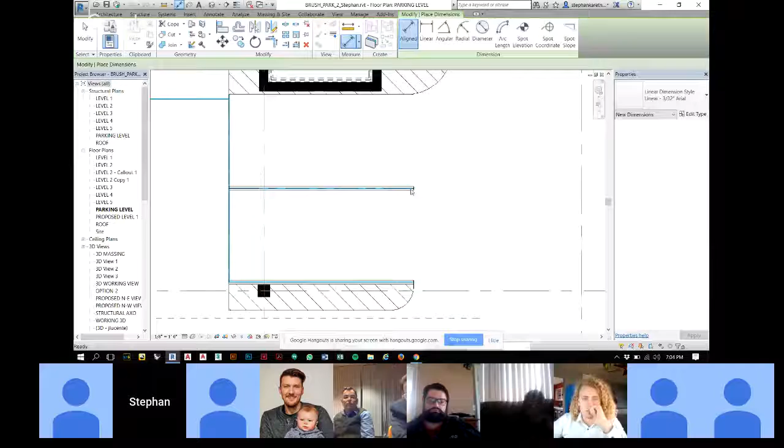The 2 bottom ones need like 20 foot. One second, take the one. The angled wall, it won't let me throw a dimension string, so I can even cut that back. So right now, just give me a 16'9" right now, and I could cut this back.

Could you put one north and south? Yep, put 2 or 3 spots on. Actually, yeah.

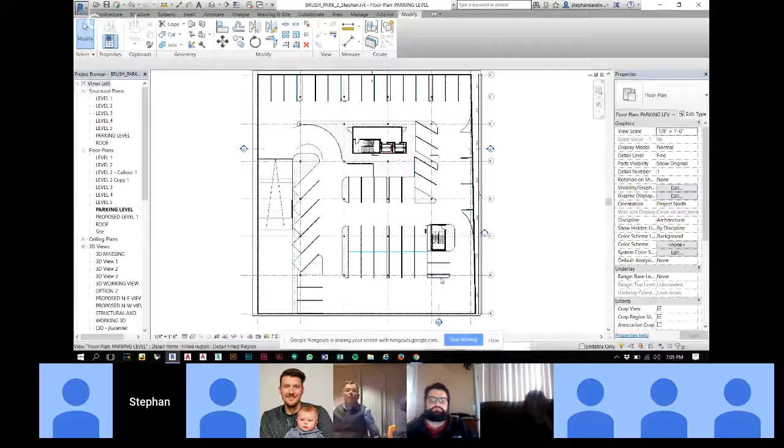Is Mark talking right now? Okay, they're in the...

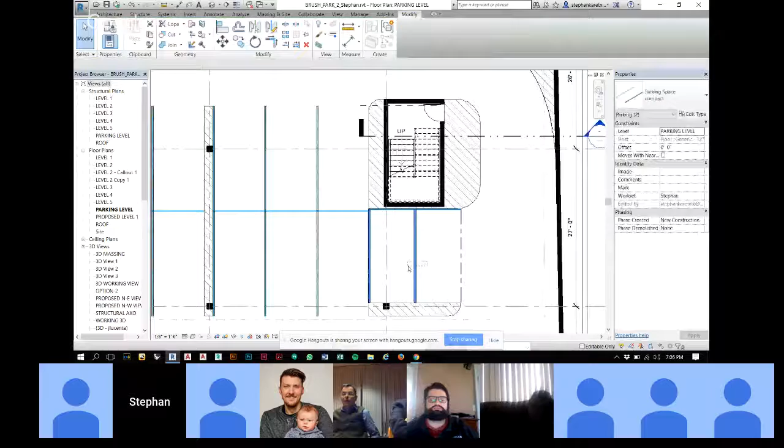What my point is, the 2 that are running east and west, south of the stair, they're a bit awkward, don't function well, but I think you could get one there for sure. If I rotate them, I could probably get it, because they're both 2 compact ones, so there's 8 feet wide, and we can still have 1 lane of traffic.

Right, I think possibly rotate them, just as long as you can make them try to get in there. And then, well, he's got the room, it's just that dimension, where his cursor is, what is that? Oh, I mean the lateral dimension. He wants, yeah, 12'6", that's a little bit too little.

Just a drive-by, yeah, so technically it does work. But I mean, you could also move those 2 spaces past a little bit, closer to the column. I think that's workable. Okay, perfect.

One or 2 orphan spaces on the ground floor. Makes sense. So that cleans up our ground floor to have no parking spots, except for the...

The other thing, so I think there's some, how should I say this without being confusing, there may be concrete, or there may be just the curbing and it's just painted on. Right, so if they're painted, it's a lot more forgiving.

So you didn't number your spaces yet, but the one up near the parallel space up near C, like if I'm parking in the spot up and down, and no one's parking behind me, I don't want to curb there.

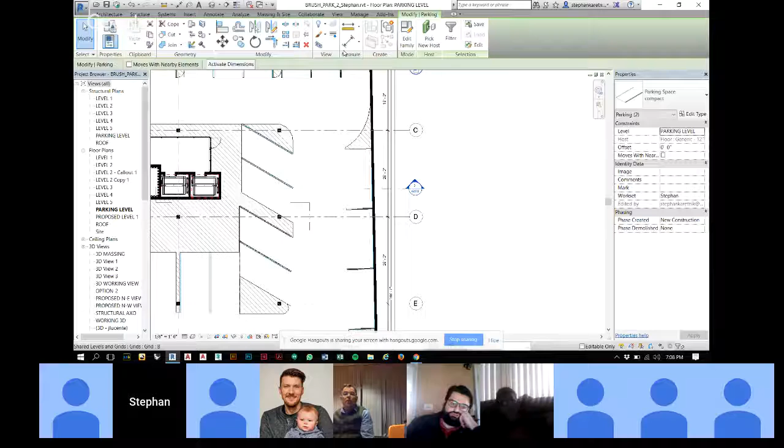Aside from that, everything else we've kind of went over the benchmark, and we're just kind of finishing it off.

What you elect, so we were looking at the energy model. John and I spoke about doing the render text, because one of the comments was we didn't have enough, so we wanted to include that. And then the third option, we were either thinking of continuing on doing the more detailed section, since we're going to be doing the renderings in 3ds Max materials anyways.

Yeah, the COMcheck might take too long if we're already doing the energy model. Those were the three major ones, but...

So Dustin will be happy to connect with you now. If you have questions, shoot them to him, screenshots, whatever, right? He'll be happy to walk you through any issues you guys may have as you're doing that. I think a lot of the stuff beforehand, in terms of our materials and the thermal properties of what we needed. John, do you have anything else?

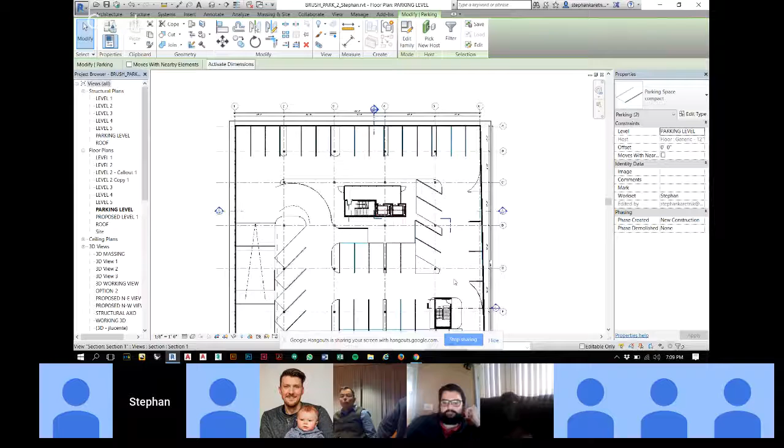Do you want to go over the sketch or no? Do you think I found the sketch, but I don't know, maybe it's better, I don't know. What do you think? Yeah, you share it on your end. Okay, it was just like, I don't know if it's even okay. Yeah, all right, let me see.

So Mark, this was just going forward with one of the comments from our last benchmark, just how to relate to the history of the site. We were just trying to build out something that would relate to the house kitty-corner, - the Ransom Gillis house. Yeah, that was it.

What are we looking at here? So the suites on the corner, we were just going to build out a little shading device around the balconies there, and I think it plays off the aesthetic of the Gillis house, the Victorian corner piece. So just something tying it into the neighborhood.

Is it something that's going to anchor down to the ground, or will it frame it like it's hovering in the sketch? No, there would be like a single column, just like at the Gillis house on the corner. Something similar. Gotcha. Oh, I see it now, I see it in the drawing. I think I see it more clearly.

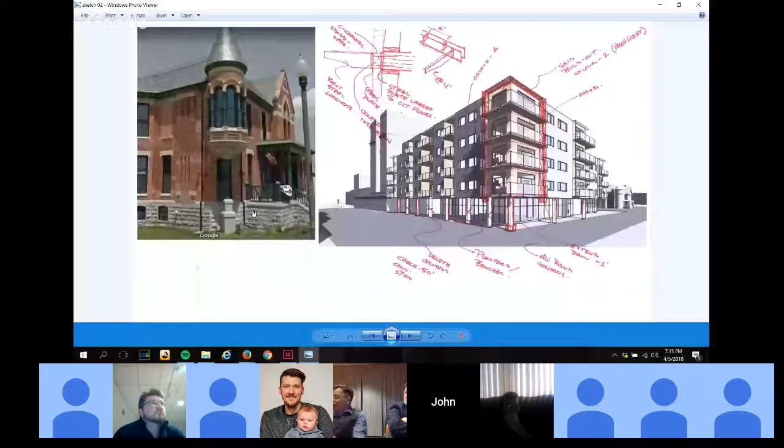What will the railings be? Right now we're currently showing perforated metal panels. Perforated metal. Yeah, so maybe that metal panel treatment is cooperative or sympathetic to what you guys explore on the rear courtyard elevation.

There is a color issue on that corner too, and that is the top turret. Yeah, that's sort of gunmetal gray. It's a slate actually. Slate. Yeah, I'm just off the cuff, maybe wonder if that could be a color complement with one of your materials in the corner. Yeah, I mean, if you can use that gray, that gunmetal gray, that would look good.

Yeah, we'll actually look into the product. I think they would have that option. Yeah, cool, cool. It would offset nicely with the Hardie board in terms of that contrast. Okay, good.

I don't have anything else, but maybe - I'm around this weekend. If you have more sketches that show the resolution of this stuff, I'm happy to look at them. Okay John? Okay, on the lab side, I'd love to see more - I'd like to go into more enlarged elevation studies with wall sections and details.

And I know you guys know how to calculate things like your R-values and your location of dew points, right? You know how to do that. I think now's the time to think about that. I'm excited that you want to do the energy modeling - I know you guys are adept on that, and I think that's great. Also, I would suggest maybe looking into either LCA evaluation with Tally or looking at how you might earn LEED credits. Oh yeah, I want to.

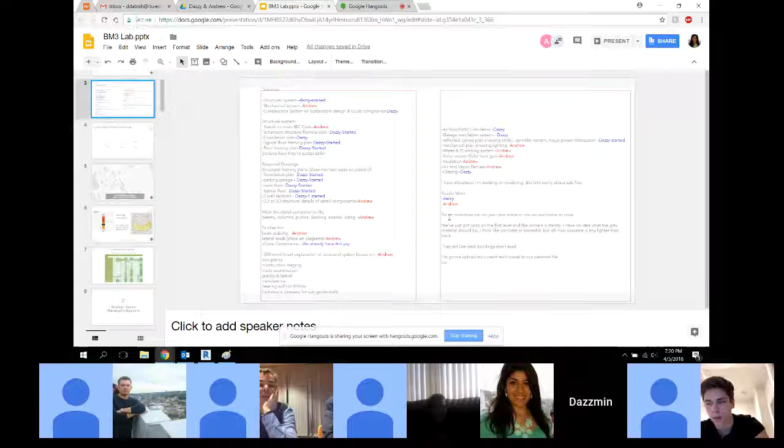So just kind of- yes, we made a list of everything. What, can you do a full screen? Yeah, full screen please. Without the sidebar. There we go. Thank you.

Okay, so that's a list of everything that we're trying to get for hopefully this weekend, early next week for you to look at. So we have most of it started already. Things we're working on are like the mechanical systems, getting all those together for the lab section. And of course for the other section, the solar control, the R values and calculations. So hopefully we'll have those to show you soon.

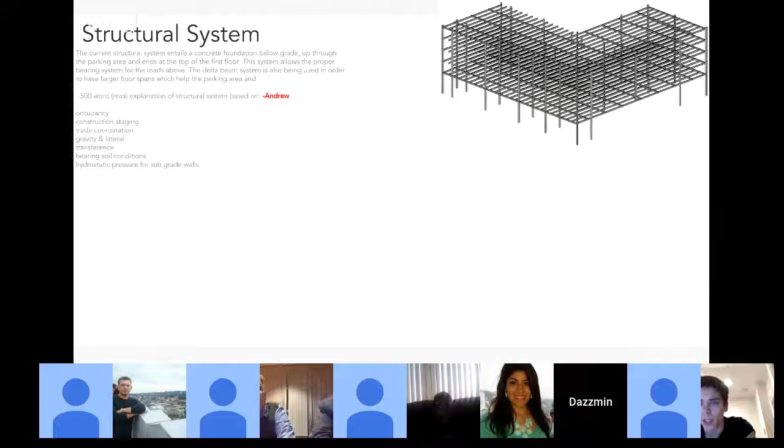Let's see, going now to slide 9, I believe. Actually slide 10, the next one after that. That's looking into the IBC parking code just to make sure that everything meets. And I noticed there were 2 different charts. Does that one look like the correct chart to be using for this parking place? Because I noticed in the PowerPoint for the IBC code.

Andrew, parking- let me try to be really clear about the parking scenario for this building. I hope I've discussed this before, but I'm so old I can't remember what I've said any longer. So you are all required to provide 50 parking places underground within this development. Cannot fit underground, you must find a place for on-grade, but serviced off of the alley. That is to say, no curb cuts from Alfred or John R. Period. That's the first thing, right? Have you heard me say that before?

Yeah, we got that. Okay, second thing is, for the retail spaces that you have or the management office spaces that you might have where someone reports to work in the building, they and any customers using the retail space or the management office space will park on the street.

You don't need to understand what an ordinance says about off-street parking because the parking requirements are set forth in our program, just like I said.

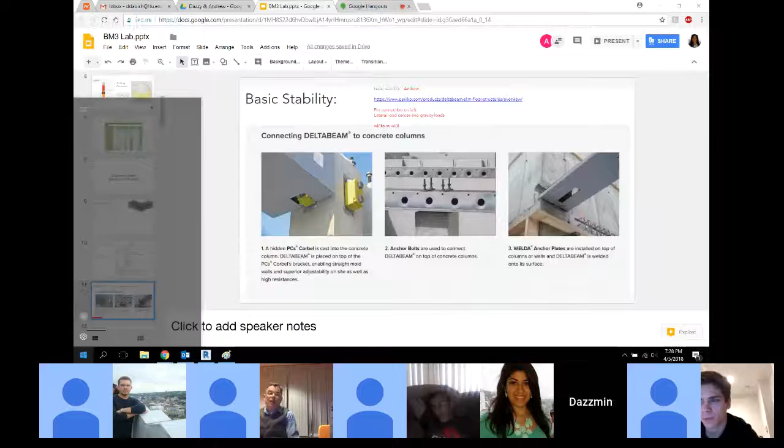One other option for you two is that DELTABEAM is trying to make some traction into the marketplace. They have a technical team you can likely call and have a conversation with, walk them through what you're trying to design and how you want to deploy their system. They'll probably be helpful. You don't have to explain that you're a student, not an architect designing a building, because once you tell them that, they're going to chase you for a project opportunity.

Okay, maybe I'll give them a call tomorrow. That would definitely help, thank you. And possibly continue to look at their specification packet and information packets. Yeah, they did have an installation one and a technical one, but they didn't have too much information in those. Maybe they have more in depth when they come in.

The question would be to understand what are the stiffness conditions at connections for me right now. What's the difference between a pin, a semi-rigid, or rigid connection and what they have? And what does that benefit you as a designer?

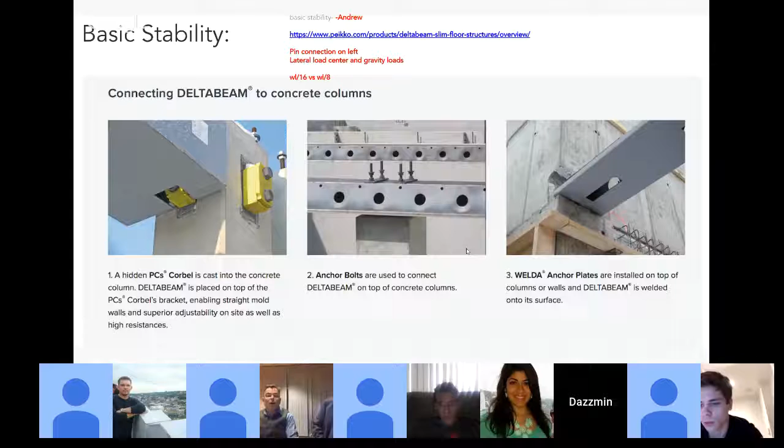The slide deck? Let's see, jumping on to, we're still working on 12, 13, and 14, which is insulation, vapor barriers, and R values. So we'll have those, hopefully this weekend we can send you those.

We had one in the middle. I'm just saying that's what this is built around. Then, if that's a parking deck, can that crane land on that? Will you fall through the deck? No, we had the crane on the lower level, and they built around that. Then they put the deck in last and got the crane on. Yeah, then they removed it. It wasn't a big crane. So we're just talking about a crane on the job site here, and how that actually happened on our project for Brush Park.

The answer is it appears possible that we could introduce a crane because you've got precast concrete slabs, and as you saw in the photo, that's going to be a crane lift. Either the crane sits on the road, which blocks traffic for an indefinite amount, and they're required to rebuild the road, curb, and sidewalk when they damage it. Or you build the crane within the confines of the job site, which is what we did: it was built on its own foundation in the basement and erected up vertically. They built things around it, and when ready to install the last piece, they dismantled the crane and finished the parking slab.

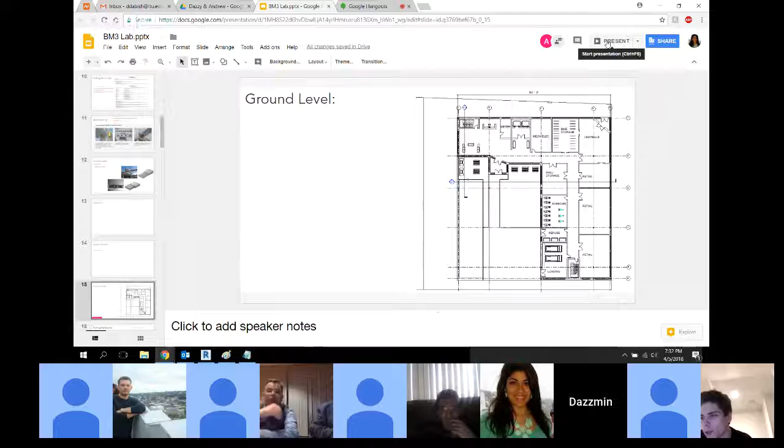So we upgraded the ground level a little. Now there's no parking on it because it's all underneath. And we added the room titles and the exercise room down here, so we're going to switch that from the residential levels.

Okay, let me walk you through a couple of doors here. I'm not sure where the front doors are. Right here, and then there's the back one. So there's an airlock, or a vestibule, for the so-called front door. The interior wall of doors is swinging correctly, Dazzmin, but the exterior, most doors, that has to swing in the same direction, so opposite of what you've illustrated.

Do you follow? Yes, okay. Now, in the same vein, you need to show—you've got a really big room called vestibule. I'm not sure what that is, but...

What is the first room when you come in? Like a lobby space, reception space? Yeah, to the right, lobby reception area. But aren't we looking at couches south of the stair at column A? Reception desk or something—what's going on?

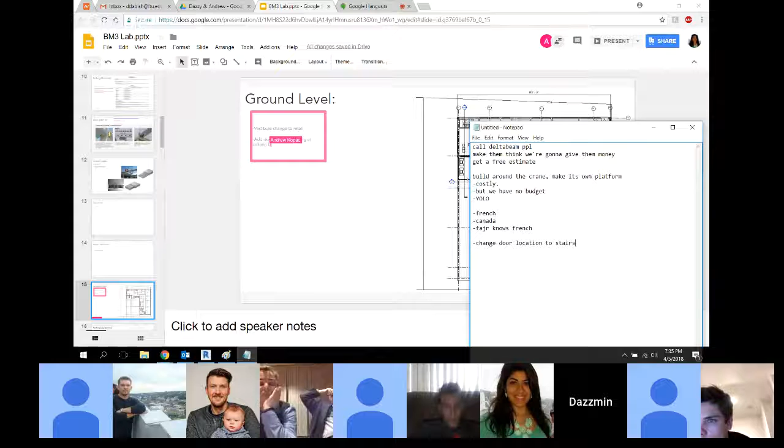So I have a whole bunch of little things. So can we go back to the plan? You need to have an airlock at column B that lets us come in from the street into your development, into this salon, this living room, this lobby, right? And then the other airlock that you do show, which needs the doors corrected, is really to the back garden or the development's sort of more private realm, correct?

Capiche? Capiche? Yeah, the courtyard. Capiche? Hello? Yes? Yes, the courtyard. Yes, okay. Now, retail, as I've said before, I don't know why we keep having to revisit this.

Retail needs to go on the hard corner. Do you know what I mean by hard corner? It's Main Street and Main Street. Yeah, yeah. Like if you're a nail salon or a hair salon, right? Or if you're a Hallmark store, you want to be at Main and Main. And so the retail needs to be there.

And I just want to mention, it doesn't concern me so much that you don't have retail indicated there. What concerns me about this drawing, you guys, is that you're showing the word vestibule, and I have no idea what that is for. That is a huge space that I can't even imagine how it functions. So that to me is problematic.

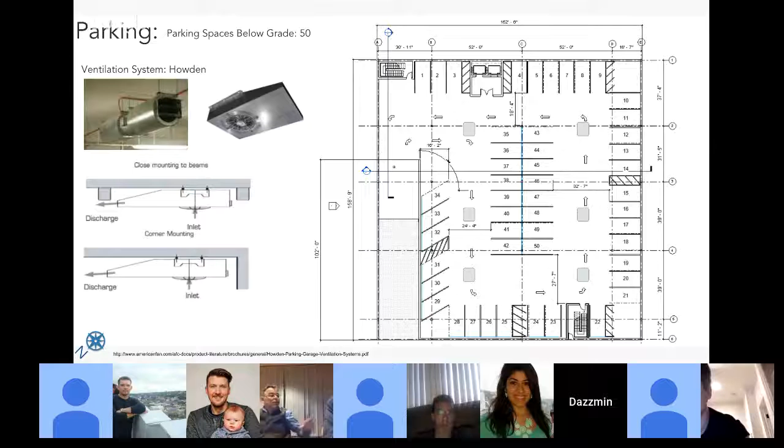Let's go to a residential floor. Did you have something else you wanted to? Can you go back to grade for a minute? Yeah, the ground floor. Thank you. So, bike storage here, does that need to be?

The bike storage - my immediate reaction now, and every time I've looked at this plan, I've always been concerned about how big this footprint is. It's clear to me that you're not in control of the program on the first floor, because you've got bike storage on the street, you've got a vestibule that's on both streets at Main and Main, and no one knows what's happening in the vestibule - not me, not in your house or your shop. You've got 3 small retail spaces, and a mechanical room on the street. That's like a pimple on a prom date, no one wants to see that. You know what I'm saying?

Like suddenly, I could see where maybe bike storage is kind of like a groovy thing on the street - I guess I might have to be convinced of that by looking at your elevations. But I don't want to see a mechanical room on the street. The street is like a coat and tie opportunity, right, for engaging passersby. Think about this as an urban solution, right? Even the exercise room - you know what I'm saying?

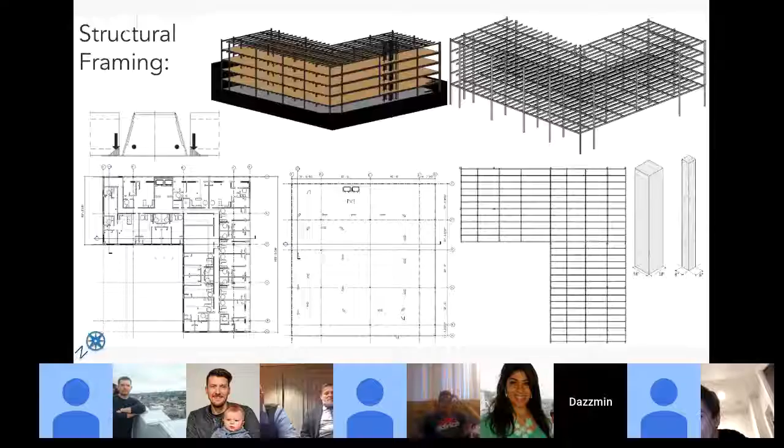Let's go upstairs. I want to see where that trash is upstairs. So where is the trash chute upstairs? I haven't put in a chute. I'm sorry, I didn't quite catch you. Didn't put one in. Well, you need one, right? How's the trash getting out? I know how the trash gets out of my apartment.

I'm gonna probably get a little cart, because I ain't gonna carry it. So I'm gonna take it out of my apartment and take it down the hall, right? I need a trash room, correct? What were you anticipating? I think we can make room inside, right by the elevator. I think we had an open room that had space. Let's see. Can you circle it?

Yeah, so, but Andrew, what did I just say about Campbell's soup and the grocery bag? That's true. Right, like I want these lights to go off. I want you to connect these things, right? So right now, assuming the trash room has to stay where you got it, because it is April 5th.

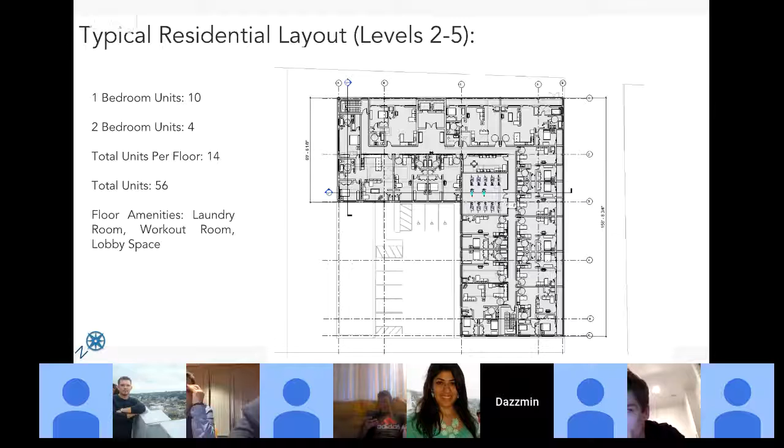Can you zoom in on this plan now? Have we fixed the number of exercise rooms? Because you have one on the ground floor now, and you had 4 before. So has that been fixed? Hello? I think that's on another slide. Let me see. I think slide 19 is the updated one with exercise rooms. Yeah, I'm having trouble comprehending what you're saying.

Is that plan typical of all floors? Andrew, Dazzmin? Yeah. So that means we've got 5 exercise rooms? No, we just need to update it on the slide. Pardon me? No, we just need to update it.

Okay, look, I mean, really, guys, I'm really concerned. You guys have got to button up the design of this building now, because you have so much more to do as it relates to options and as it relates to the last assignment. So you guys are both on notice. I'm going to do anything I need to make you get this wrapped up by Friday. I want to see a deliverable from you that puts all of the stuff in a correct state, because I can't let you advance unless I see these things fixed.

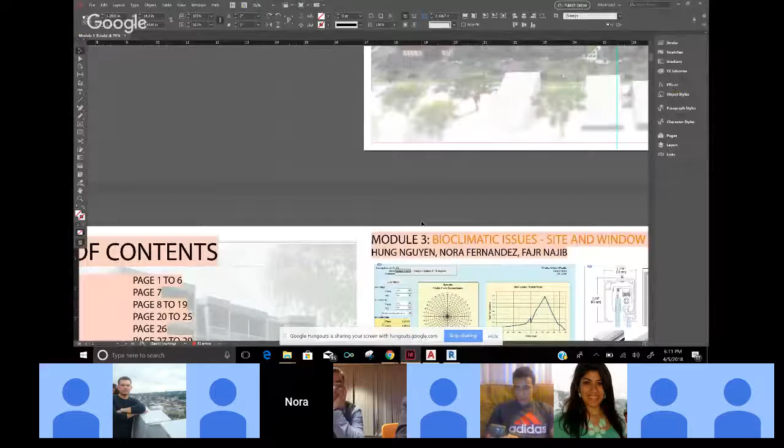So for the bioclimatic, I was able to log in and get a software for that daylighting from the university. I can't remember what university it was. And they gave me these graphs. I can input numbers, but I'm not sure where I'm supposed to get these numbers from. So I kind of wanted to see if you can guide me on that portion. Is it more just the climate zone that we have in Michigan that we would put those? I'm not sure I understand much of it, so I was going to see if I could get some feedback on that.

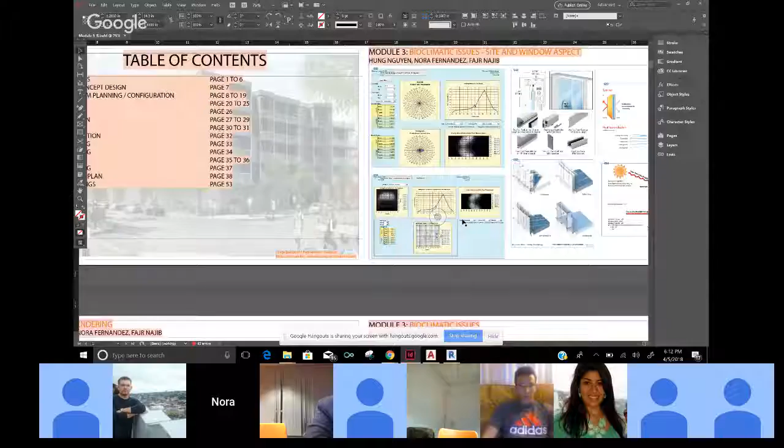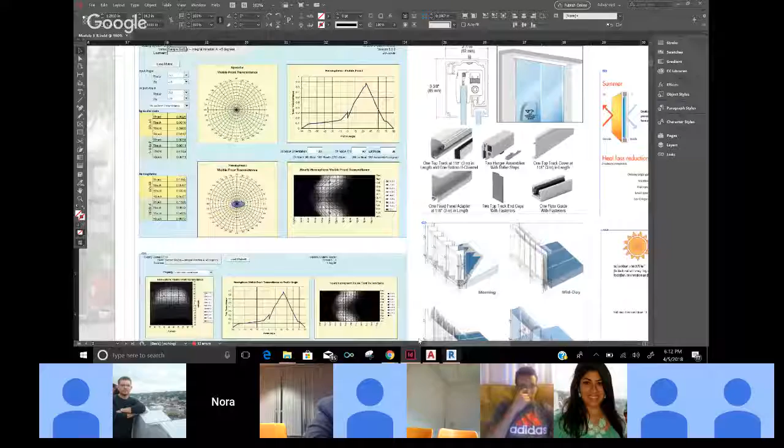You may need to zoom in a little bit. Yeah, I'm sorry. Let's move the screen to the right, zoom even more. And zoom in more, sorry.

Okay, what numbers are they asking for? It's asking for the input angle and the output, and it's asking us to load a matrix. So do I need to create whatever I get from Revit and upload into that? Or is it like a document, like Excel, or is it more of a file itself, and then it does the numbering for us?

Why don't we handle that? Sorry, you cut off. I said why don't we just handle that with another email exchange so I can look at it further? Okay, I'll go ahead and do that.

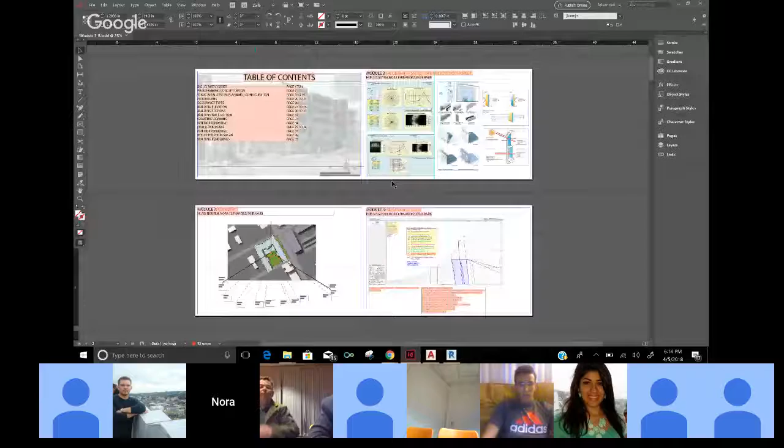Let me zoom out then. Well, I did it too much. I did the chart and updated that on the chart. I did the hours, I provided the hours. So I can do that in an email exchange as well, just to make sure I'm on the right track. I just want to let you know. It's still a little confusing to me, but a little better. We'll exchange email. I also did a calculation of the glazing, and I did a modification to the surface to volume, and all of those that were.

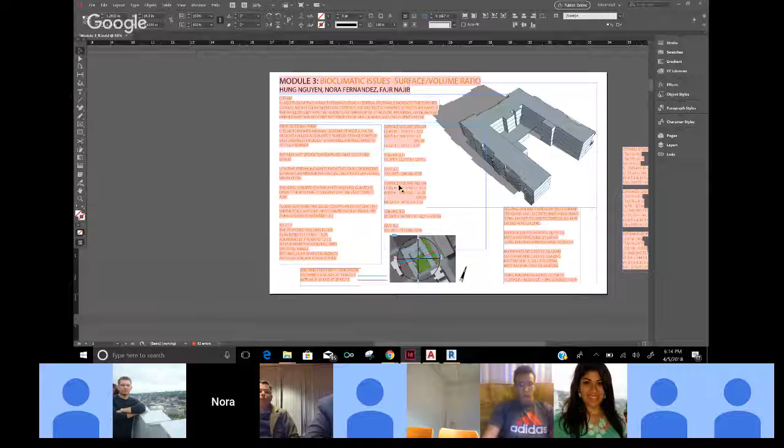Can we see it? Can you zoom in and get rid of all the highlighting? Everything's highlighted, I can't read it. Why is all the text got a pink box around it? You know what, it's a setting that came already. I don't know how to take it off. What's that?

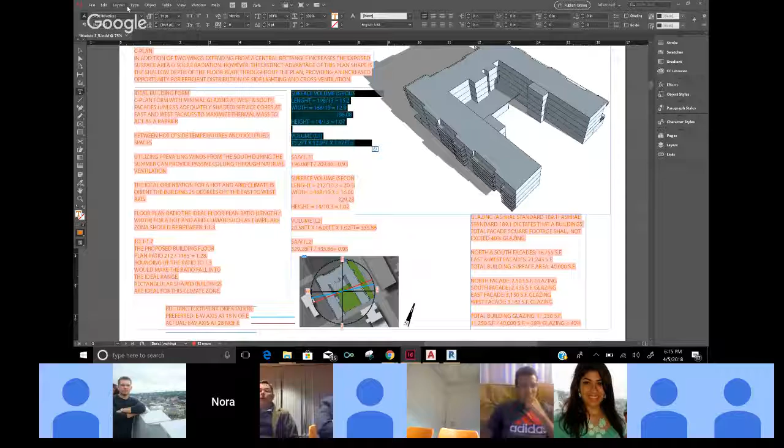Say that again. I see, but if they try to present it in the final presentation - if you have it on your font, it'll get rid of the highlights. It'll show the font like it's supposed to. Click the overprint preview button. Overprint preview, where would that be? Is it in the view tab?

Orange will never print on here. Yeah, the orange might not print as dark as you guys think it will. So make sure you do a test print, because this is the live file. I want you to create a PDF of these sheets so that it's as legible as it needs to be, because you guys are from out of town and have to present online.

Right, okay, I'll make it black. It's easier to understand in black. I'll change the font. You guys do need to do quite a bit of spell checking. Yeah, they've been put on notice about that as well. Okay, got a lot - there's a lot of typos, spell check.

Okay, so my question about this would be, I see your calculation. It looks reasonable for surface area to volume, but what is the recommended ideal for a U-shaped building in a temperate climate, or the one that was in our textbook? Do you understand what I'm saying? You have to compare it to the ideal to know how far off you are, right?

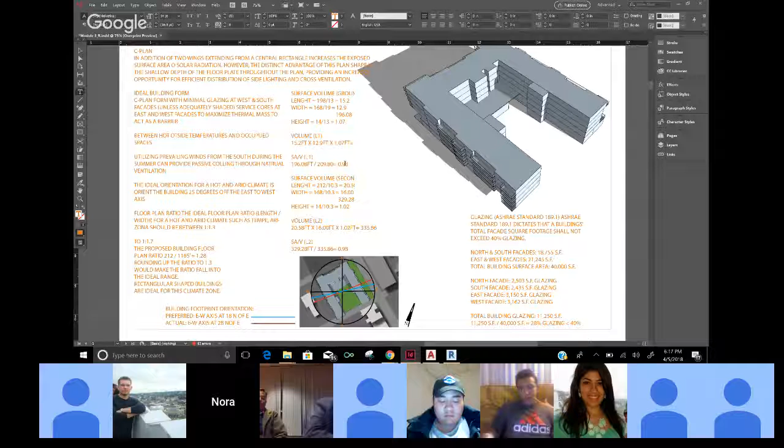Percent glazing, you're at less than 40%, right? 40%, good. So you're under the ASHRAE recommended, below ASHRAE - that's a good property. Okay, so I'll review this again and make sure it's compliant with that ratio that is provided.

Well, it says floor plan ratio, the ideal ratio of width to length should be - sorry, I can't see - like 1 to 1.3 or something. It goes by... no, go to the left column. Oh, this one, floor plan ratio, it's the ideal floor plan ratio.

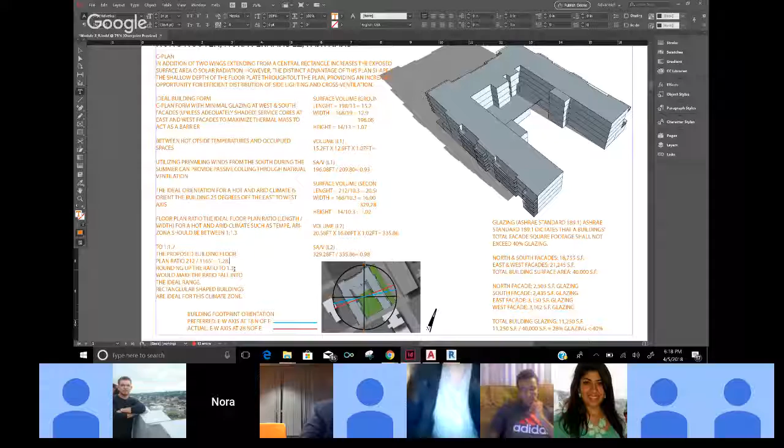Above it says 1 to 1.3. Is that right? Oh yes. Okay, so then what is your floor plan ratio? If that's the ideal, what's yours? It's 1.28. So you want to indicate you're very close to that, right? Right. You understand what I'm saying? You've got data, but you have to tell us what it means, right? So I'm below the 40% glazing. Good, I'm doing well.

I'm half of what ASHRAE recommends as the maximum desirable, and very close to the footprint ratio. That's a good property. You want to demonstrate your successes and the differences, or at least be objective about it. You need to analyze and say I'm close, I'm better than, or maybe this is how far off I am as a percentage from the ideal.

At the end of the day, here's what I need you to carry forward: that you understand what bioclimatic analysis procedures and methods are in architecture, and you know how to start that and be credible in the work you might do in the future, in the event you're working with architects who see that as a measurable, important attribute. And if you're working with firms that want to do LEED type projects, these are some of the issues you'll have to grasp.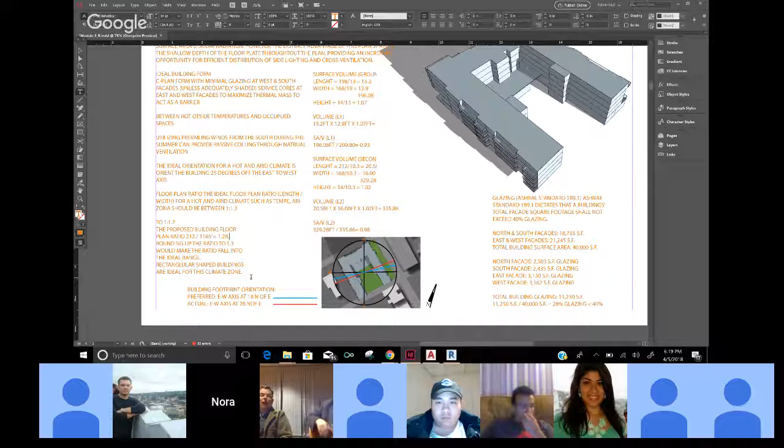Okay, just one thing. I was talking to your classmates: if you click on edit, then go to spelling, and turn on dynamic, that will highlight all of your misspelled words. Wait, like occupied is spelled wrong, outside is spelled wrong. Occupied. It may be because they're all caps. But you can probably take that into Microsoft Word and run a spell check that way, and it may recognize it better. You just copy all the text over.

Nathan, that was my suggestion. I said that to Caitlin, and she just rolled her eyes. She said that is so old school. So you and I must be... what do these millennials know?

But really, I think that's a good idea. That's sort of like the discussion we had the other night with Trevor and Alec about doing things digital versus analog. You guys have been told before that you have spelling issues, I said that early on. So what you need to do is find a way to highlight all of your text so you can see where it's spelled wrong. I spell things wrong too, so I have to be vigilant about that.

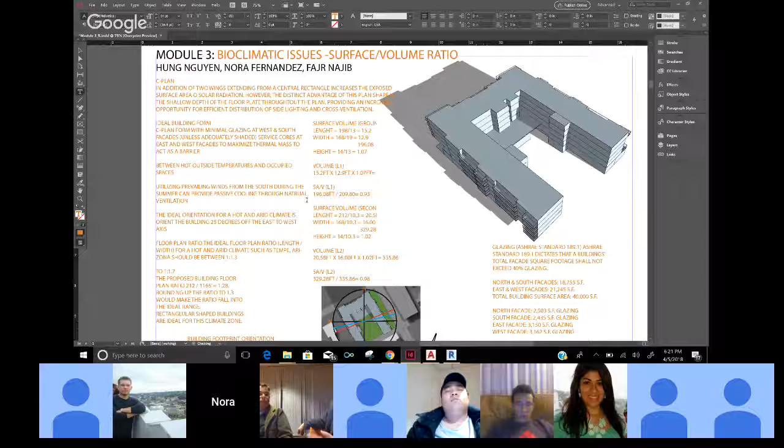So copy and paste all of this text into a Word document that will emphasize those spelling errors, fix them, and then replace the text. A lot of people like you folks are very visually acute, you understand spatial concepts and objects, but some of us are not as adept at things like spelling, and I'm one of them too. But I can tell you this: if you expect to be in a firm and be put in front of a client to show something, you have to fix this. Otherwise, you'll never get that opportunity.

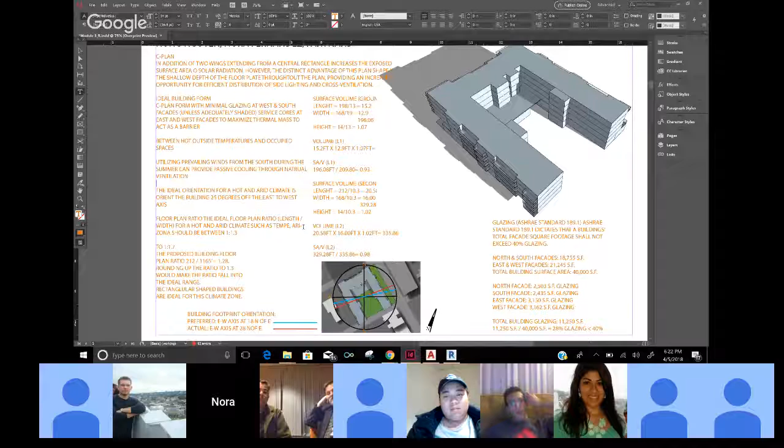Martin Schwartz will drop you a whole grade for this, by the way. Be glad he's not talking to you today. You know Martin, yeah, he'll drop you, won't he? So you need to fix those things. If you need me to look at anything, I'll take a red pen and highlight them. No, it's not sad, it's the first thing I noticed, Casey. You just geek out on words, that's all.

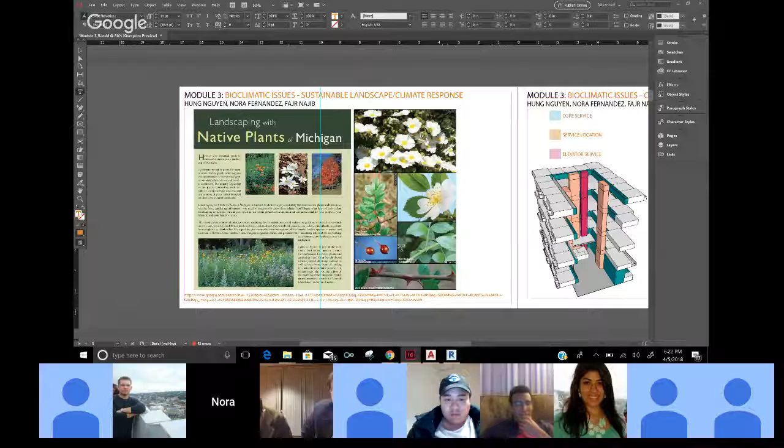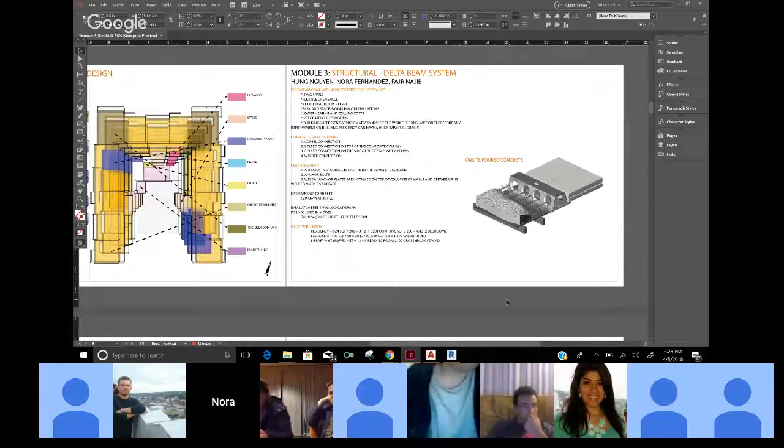Are you running the slide deck? No, Nora is. Is she talking? I don't hear her talking. She can mute it. Well, one of you guys needs to talk. Nora, you unmuted. Nora, are you going to talk?

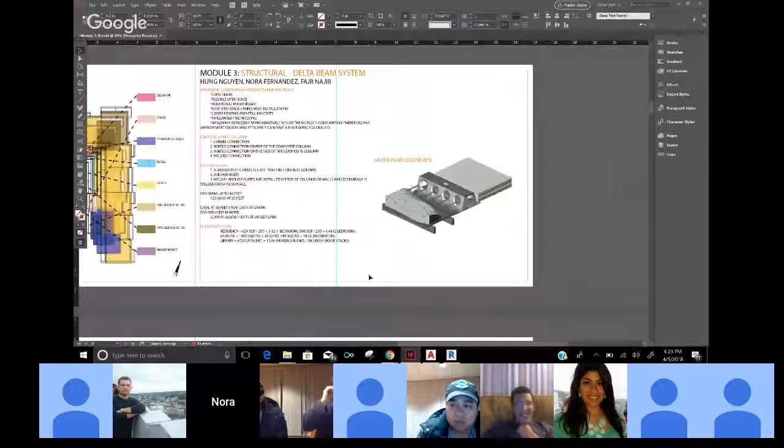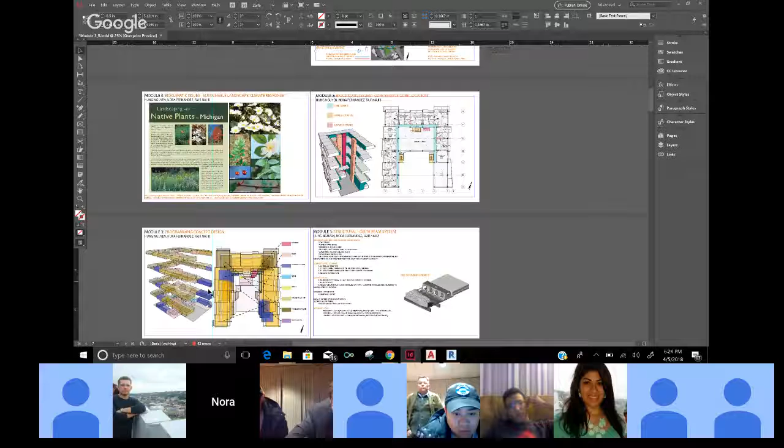The next portion is structural, so let me go ahead and go to it, and I will let the person involved with structure take over. We missed the other slides, if you were talking we didn't hear you. For the core and service section, we condensed it. We had a lot of diagrams, so we pretty much just put the 3D view with the floor plan there. We haven't done much update, I don't know if it requires an update, we just kind of added that information together. Same thing for the programming section.

There's a lot of information in the telescopic view of the plan, but it's not easy to read. We only have two or three, condensed. But these two are right next to each other, making them both very difficult to read. If you're going to do them, you might only want to do one per page. Oh right, because we had them one per page, and thought we had too many diagrams, so we ended up putting them in.

I would say the middle telescopic view with all the spaces on it is not legible. I will be honest with you, I don't think a layperson would understand that. It's such an unusual view of a building that no one will understand that it's the building stacking. It's easier to understand the stacking in the floor plan in the left drawing, but the left drawing eclipses some of those programs. You have to find a way to make it work with one. For now, I'm gonna go ahead and move it out.

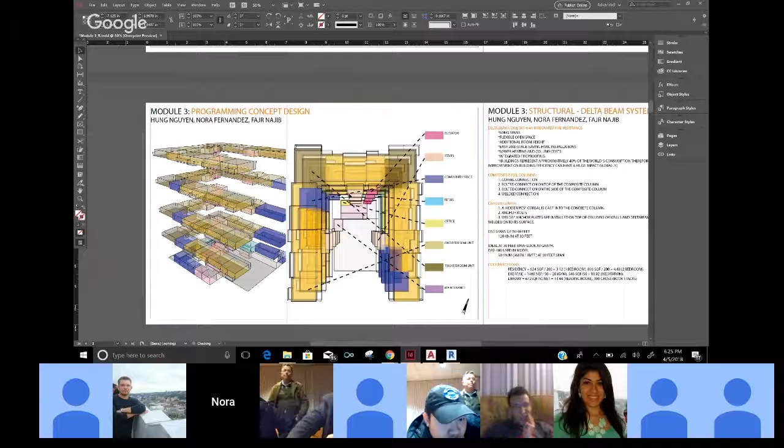What? Let's just rip it off the sheet. Okay, well, whatever, I think it works.

Wait, Nora, just to make sure, is this the lab file or the studio file? No, this is lab. Okay, well, I would say we should definitely change this information because we already selected these.

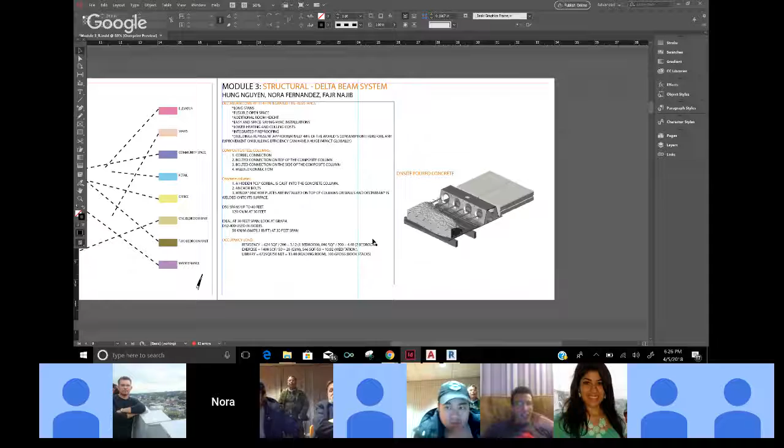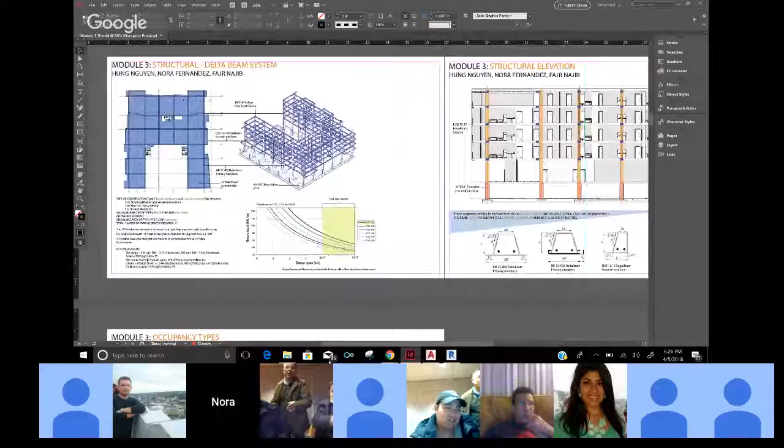Let me share my screen. Or can you go to the next slide? Let me see what that looks like. I'll just share my own. Oh wait, we actually coordinated. Okay, yeah, I'll share my screen. Okay, hold on a second, I got to reveal the participants again. Okay, Fajr, we're looking.

Okay, most of those files were updated. For the most part, I have frames depending on the different levels. So when they alternate, this is the ground floor, this is the parking floor.

Can I make a quick suggestion? Sorry, that's the ground floor right there, this is the second floor. Is it possible to put in a grayscale of the actual architectural spaces underneath that structure so we could see them lightly shown, just as a reference, so we know where spaces are falling relative to that structure plan?

Yeah, I can add those. Show the legend on the left. Okay, thank you, the legend could be smaller. But also, anything that you show me with structure has to be dimensioned.

Oh, so I have to add dimensions as well? Yeah, because I'm asking questions about spans and issues like that. I have to know what the spans are, for example, I can't do that without a dimension. Okay, that's fair, I'll add dimensions for sure.

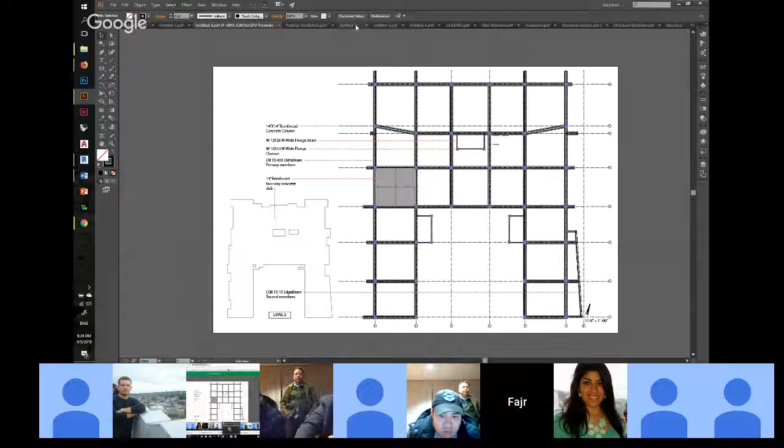Let me see. So that's a typical floor from floor 3 to 5, it just shows the different configurations of the frame depending on how much is needed. I understand. Again, I would suggest an imprint of the floor plan underneath it in a light gray halftone, so we can see how that corresponds to space. Okay, yeah, definitely.

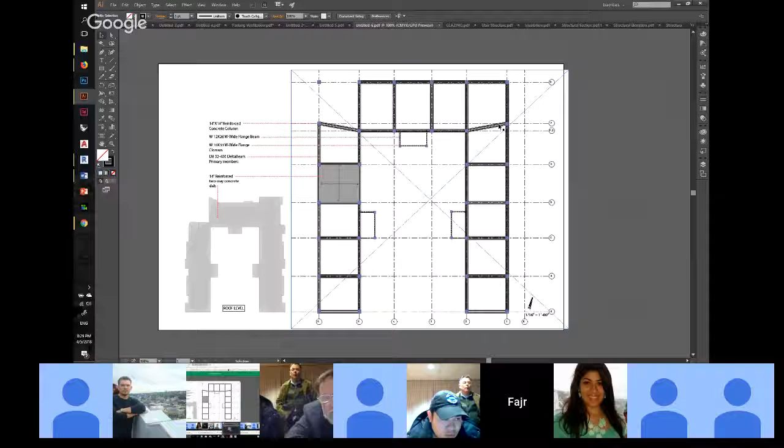And then same thing, that's the roof level. Can I ask a quick question, go back one, back to the plan again. Now I know those beams have that angle condition up around that one there. I thought those went back to being straight when they got to the typical floor plates, is that right or wrong? No, they never go back to straight.

But then I have these for the stairs, so they just show how the structure for the stairs is slightly different. There are different members in there, it's not delta beams, and how the fire protection runs all the way down, and it doesn't kick in here because of the necessary space needed for the higher ceiling space.

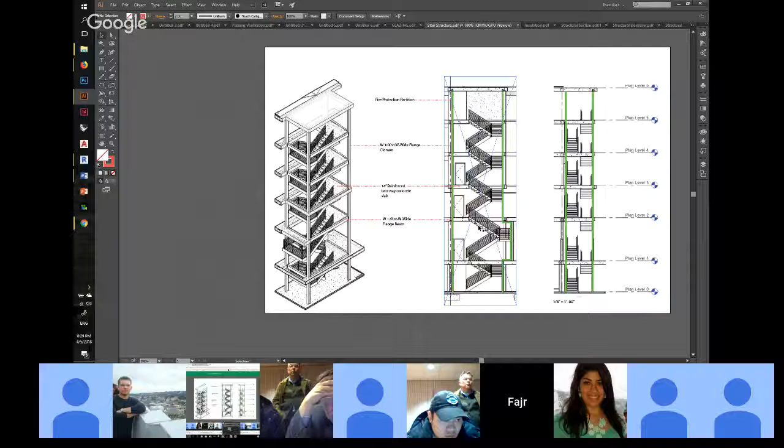Do you have headroom? Because I see that the floor above is kind of imploding on that landing. Right there? Yeah, I'm walking down the stairs and there's a floor hitting me about the size of my chest. You need to cut another section. Yeah, I have to look at that, I definitely have to look at that. You got to cut out the floor if you can, but even if you did, the beam is still hitting me in the chest, you understand my point?

Right. Well will there, oh yeah, the beam will be there, right? I'll have to revise that for sure, see if we can do that please. Yeah, I'll have to revise that.

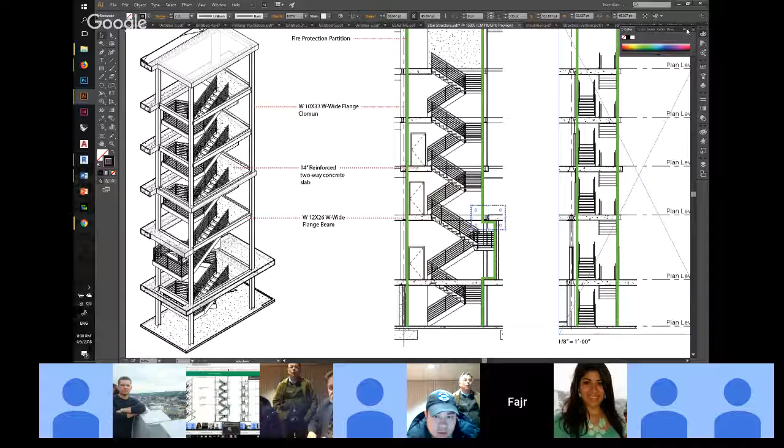Just talking more about the way we're going to have the delta beams come together. At the base, when it comes to the foundation pillar to the actual hollow beam, there's a condition where they have an anchor plate that attaches to the hollow steel column with the concrete, and that fastens to the pillar through bolts. Then when it comes to the beams attaching to the column, the beams are going to be bolted and welded to the column so they can create a rigid connection and withstand the lateral loads.

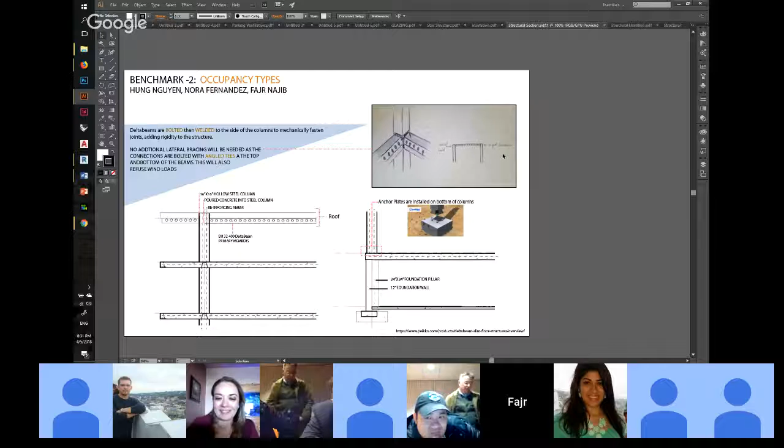Yeah, I was looking for an image of a delta beam being bolted, and I couldn't find one, so I just drew one. What? I'm smiling out loud, that's all. Could you contact the manufacturer? No, but I kept looking through their website. You could. I could. You should contact them. I should. Okay, yes.

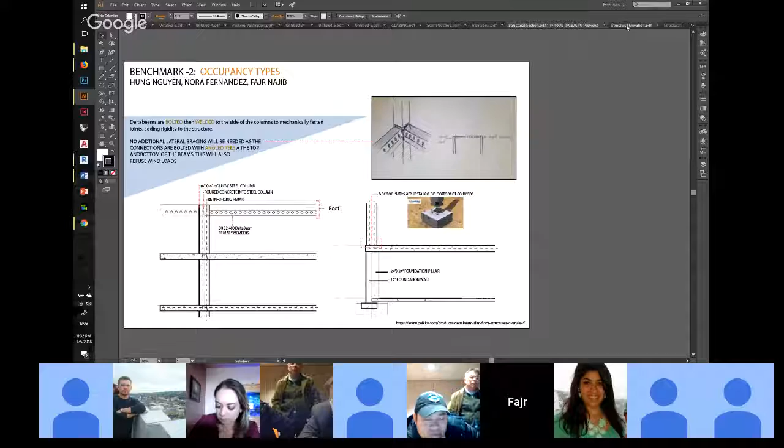And then what is that? This is just a section of the entire building. You're titling this occupancy types, but that's not really what this is about, is it? No, I want to change that, but I just didn't get to change it yet.

Yeah, that's just like a section of the overall building, showing how you have the pillars at the bottom, the regular columns going through past that, and then you have the beams in blue.

It's still, unfortunately, that one—the second column from the left—doesn't register over the beams. The beams don't register over the columns again. That's the bent one. Oh, never mind. I understand. Should I put a note on it to explain? I'm not sure. I don't know exactly how to do it, but it would have—

It might be useful to have a note saying the beam realigns with the column at a distance or something beyond. Yeah, because I remember we talked about it. It came up again, I guess. So probably should take a note.

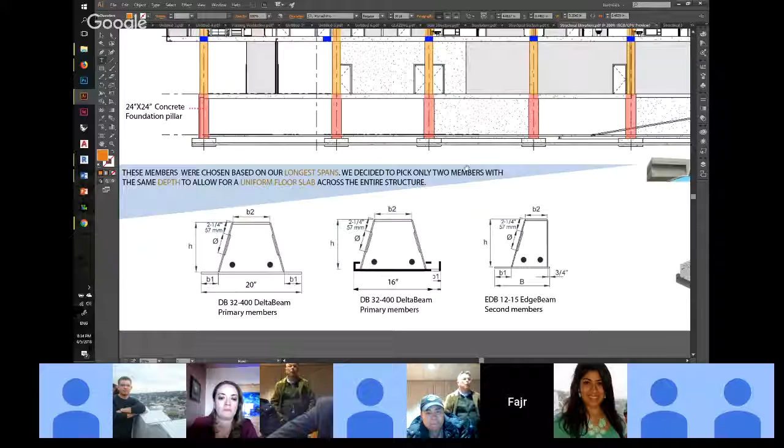I'm not sure what that would mean. Can you go up and to the left of your drawing right now, to the balcony? Right here. Okay, so the balcony is cantilevered, correct? Yeah, the balcony is cantilevered, correct? Yes.

So you're going to have a very rigid connection at that balcony back to that beam to make that work. You understand that? Yes. I looked into how Delta Beams address cantilevered situations, and they take that into consideration with their connections—so all of their connections in general. So I'm taking that it can be rigid. It didn't specify whether it had to be a rigid connection or not, because they still had the same specifications regarding those pin connections with concrete columns.

It has to be a rigid connection going to the left, otherwise the cantilever doesn't work. So you're saying it has to? Okay, well, yeah, I made sure that all of the connections are rigid the way we're attaching them.

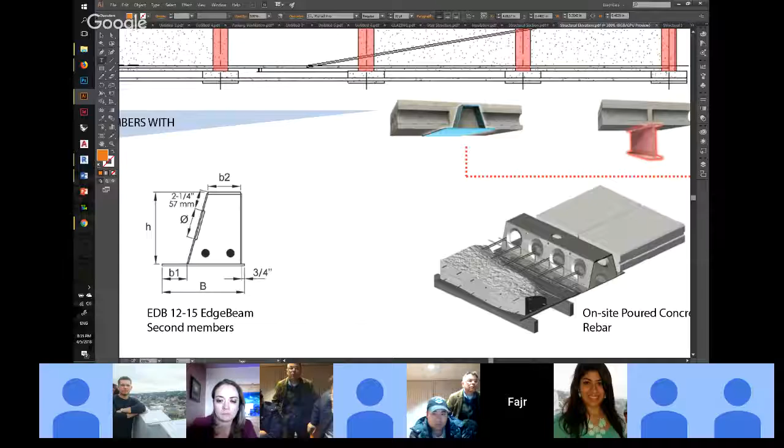Should I zoom out? Yeah, go ahead. Here just shows how the concrete is poured and how the rebar is embedded through the Delta Beam, and then continues on to the next pour that comes beyond it. And here's a small diagram showing how the headspace is being cleared thanks to that system—why it's shallower.

Does embedding the slab in the beam help with rigidity in terms of lateral load? It gives a more direct load transfer to the boundary chords and strut members when you have a lateral load going through the diaphragm. So theoretically, yes, it should help, because the boundary element, the chord and strut, is aligned with the diaphragm rather than being below it. Does that make sense? Yeah, that was one of my assumptions, but I wasn't sure, so I wanted to ask.

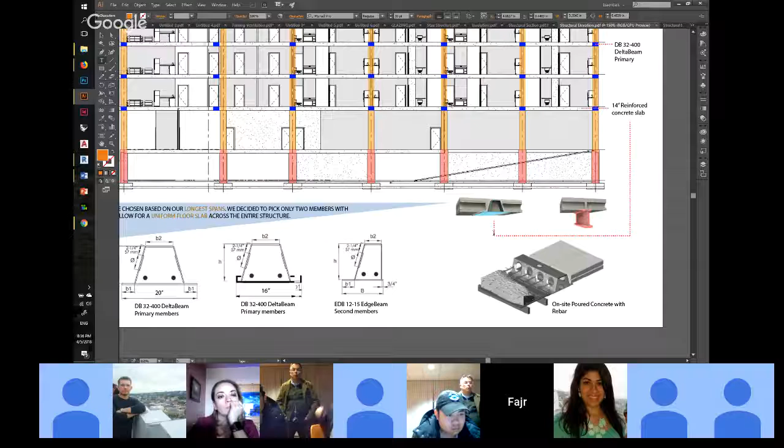Yeah, this is the same one. Should we finish the lab and then ask further questions, or should we just ask them now? If they're short questions, or something I don't have to research, I can answer now. You can take it now.

It's something you addressed about parking ventilation during our Benchmark 2 presentation. We decided to go with jet fans, and I came across jet vents, which had much more detail on how they operate, their thrust, and how they're installed in the parking system. But I realized they're based in Ireland, so I assume we can't use that system. I would think they'd have a U.S. distributor, right? I was looking for one and couldn't find one, and I'd say that would be hard to obtain. So I figured there are also jet fans used in the US, and I could just go with those instead.

Do you have any openings through the courtyard that let air into the lower level parking right now, besides the ramp? The only two openings are that ramp and the exhaust air right here. Okay, well, if you could cut openings in the slab, that would be another way to let air in, probably in this area where there's open space on the ground floor.

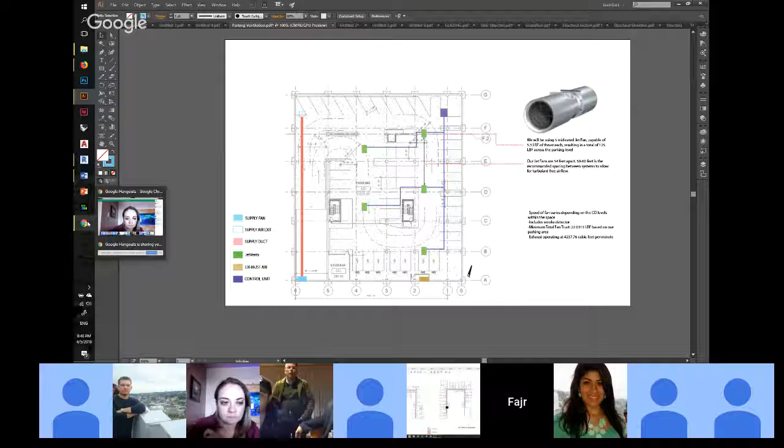I guess we can move on. I probably have another question which might be longer, but we can move on with this lab section and come back. Nora, do you have the presentation, the Hung section? Yeah, I'll share mine. Or do you have it? I got it, I'll share mine. Okay, so we gotta go to Hung.

But those outdoor units for the VRF, can't they also be on grade? Yeah, they can be, but since you're close to the first floor, maybe think about that. We have all the PV panels and also heaters on the roof, so it might as well be there. Electricity is always going to go through the electric panel no matter where the system is, and get rerouted down, so proximity isn't really the issue. So you have solar panels, what type of hot water panels?

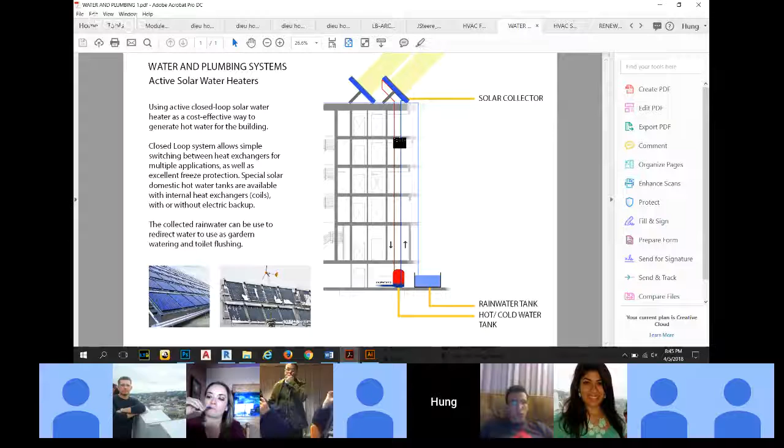Next to the rainwater tank, there will be using both rainwater and recycled water. That's used for the building's toilets. That's for the HVAC water too.

I even see the construction lines on there. This is making me cry.

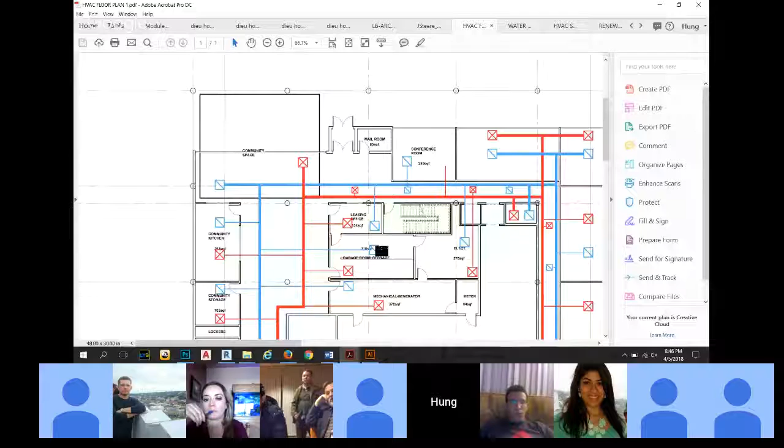That produces that movement. In some cases I think you may need more emitters than you're showing. I suspect some of those larger retail spaces might wind up having to double the emitters - you'll have this out, probably a couple, but this one might be way back, and there might be two returns, or you could do it for the retail like that.

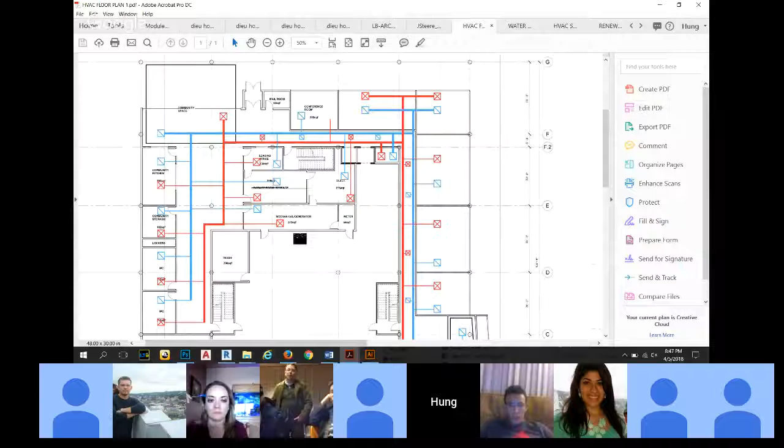You could do one here and then one here, based on the amount of square footage you have. I would think that's not going to work - I was going to do that, but when we were talking about the unit plan with the kitchen and living room, I put 2 for each. No, I'm just talking about retail. I'm saying based on the square footage and the thermal heat loss, I'm not sure that's going to be enough. Quick question - the trash room and the mail room, I didn't put it.

Trash room, what? He doesn't have any service. Is that going to be air conditioned? And it's going to have exhaust - its own exhaust. Because that room's going to stink.

What about the mail room? Or is it completely inboard without any surrounding outside walls? There's got one outside wall right here, and the mail room has an outside wall. What room are we talking about? The mail room - I'm not sure that's needed because it's just going to get air from the lobby. It's probably not - does it even have a door? Yeah, it does. I don't even know. Really, see what I mean? Just make it an extension of the lobby.

Main lobby - already showed you the unit back in the last class, can go back to it. This is just the HVAC for the hallway, for the lobby corridor. Also for the gym area, not the library - that's the prayer room, the meditation room.

Okay, but again, I'm looking at that prayer room on the lower right. I got supply on the outside wall, but then I got return on the outside wall too. Understand what I'm getting at? I think you're gonna have one return back here, but you're gonna have heat all along. Right, you're gonna want it in this room - you're gonna want to put supplies on both sides, and maybe return.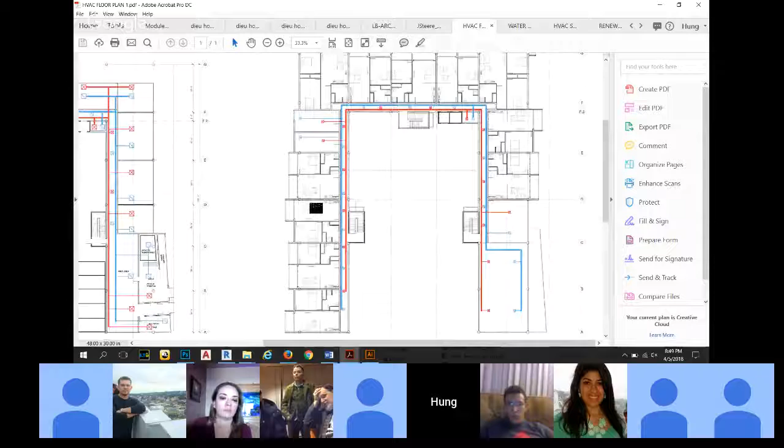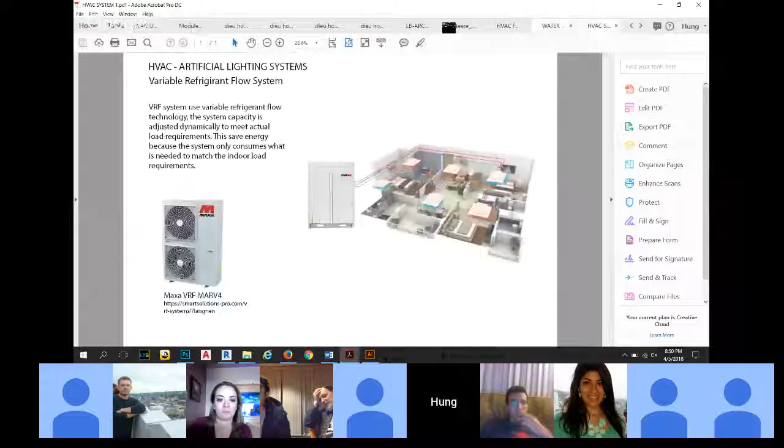Okay, and flip - go back. Flip. These would flip, okay, they go the other way. Red inside, and where the loss is, supply goes - the loss is always along the exterior.

Turn. You say that you want the... I would put supply and supply, and I would want to flip the supply and return on the inside also. What, in the fourth drawer? Yeah, that space is so small, it doesn't need that many returns. I would think Professor Farlow's correct - you could probably get down to returns, probably 3.

Not even - supply, I don't know what you're saying. The reason why you put the supply in is you want positive pressure before the return; you put the return in, you also suck it out. You want more supply, not much return. I'm also asking the same question - do I need a return at all? I'm thinking not. In other words, you just let the air infiltrate directly. Once the door opens for the unit, that balances that space out.

Right, so you would want always positive pressure before the return. If you cut it down to 6 or something, that's 3, that'd be all - I'll change that.

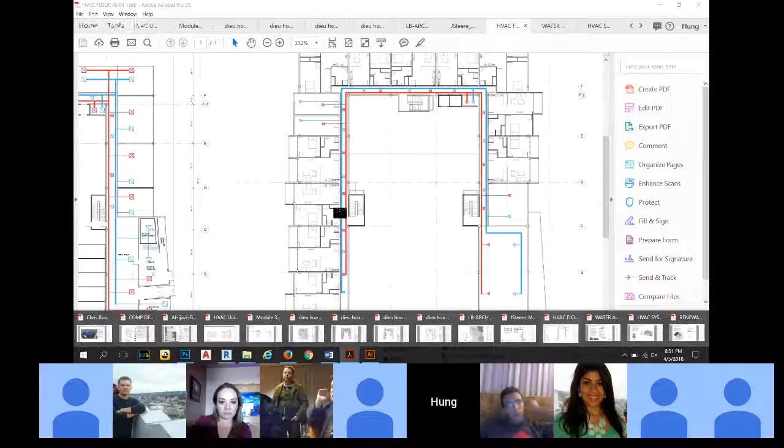So that all basically gets converted to AC. Yeah, goes into the electrical system. And we have that meter - storing the batteries? We do, I think we do, but I think this takes 5 cents.

That means with the price, you don't have to have batteries. I think you just push it through.

If you had more electricity, you could sell it back to Edison, but they don't give you much for it. Now, when would that ever happen? I'm not sure, I don't know. It's basically 20%, you're pretty much draining it down.

Yeah, that's what I'm saying, for buildings like schools. You're only going to hit at best 5 to 10% of the building's electrical load, trust me. Because even though you're energy conserving, you're not going to produce more than you could. I would highly doubt it.

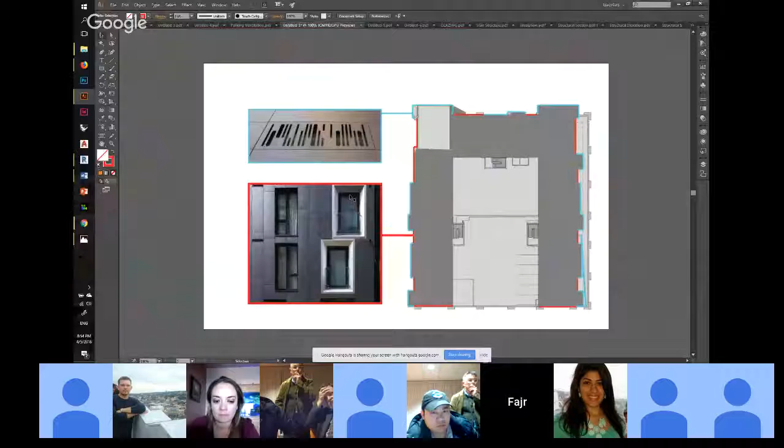So this is how we kind of want to address it. We discussed how our HVAC unit is going to be on the balcony, and we talked about how we could implement the design of the panels as a louver.

Correct, so we were considering having this kind of Equitone panel on the balcony facades, so they could act as the railing and as the panel walls behind the railing, as well as acting as a louver for the HVAC unit. And then the rest of the facade, which is not a balcony, can be this kind of facade.

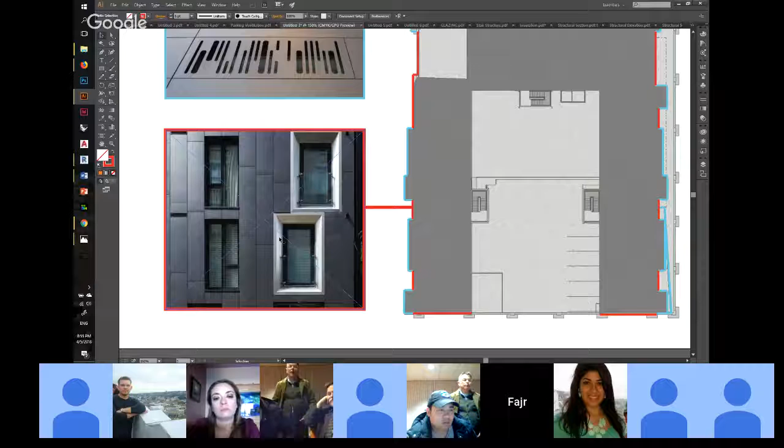Lovely, I love how streamlined that is, how one idea is working a number of different ways, and that promotes efficiency and economy. Yeah, that's what we're going for.

Are all the exterior panels Equitone? Yeah, we're going for one material, just different ways of how they are made. I understand that, but going back to Professor Farlow's comment, that also streamlines and simplifies construction and construction coordination, it reduces the number of trades. You reduce the number of modules. Right, and if you've got errors, you know who to go to.

But you can also promote variety and difference by doing different colors or different textures or finishes, doing them random or in areas. So those are ways, variations on a theme.

Does Equitone qualify for LEED credits? Do you know? Yeah, I know it's LEED certified, I just don't know how many. Okay, that might be worth researching.

Yeah, okay, and also something real quick. Oh, go ahead, I like where you're taking this. There's one detail that I can't show here, but I want to show you, it's part of this section.

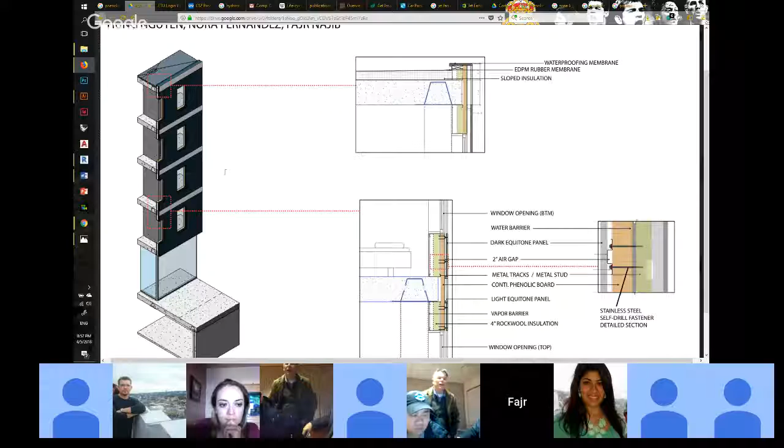Sorry, I think you ought to illustrate it as an elevation. Does it project forward or recess or stay in the same plane? It's on the same plane, so it's like this, it's in the same plane.

Are you thinking of orienting the panels, the Equitone panels, with predominantly vertical joints? Yeah, yep, except for that one moment where the levels change and where the slab is.

I think the jury's still out for me on that. I think you ought to look at this, because I think what happens is that the vertical panels that are, let's say, the dark gray, are all just going to stack and be like soldiers in line because they're going to be interrupted by the belt line.

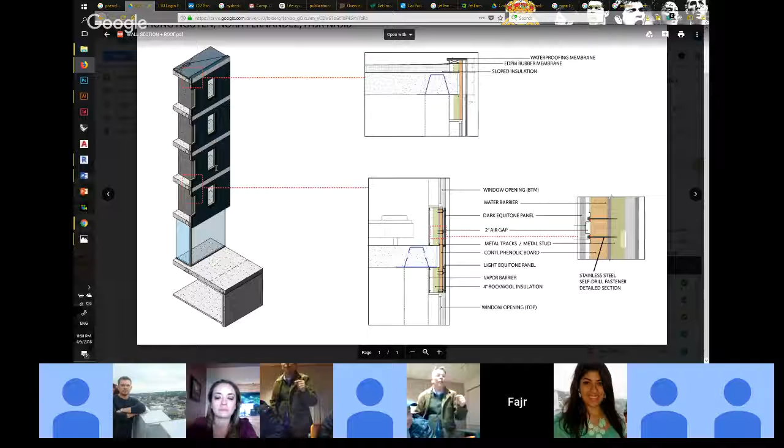But in the picture example you had a moment ago, there was something kind of nice about the running bond or the modified bond pattern, where the horizontal joints didn't always line up. They kind of told their own story. So there's something nice about that.

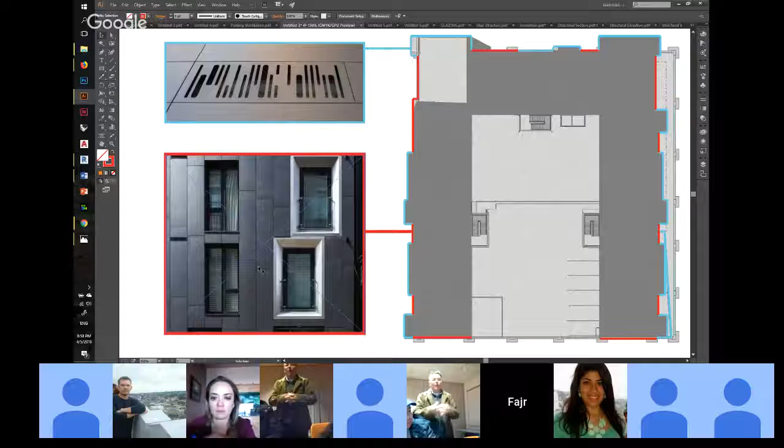Think about how you wrap the stair core as well. Those are going to be unique elements that may need their own attention. Especially since the stair cores are inside—aren't they seen from the courtyard view? They are seen from the courtyard, they're nodules on it, so I think they require design attention with respect to how the panels envelop or contain them.

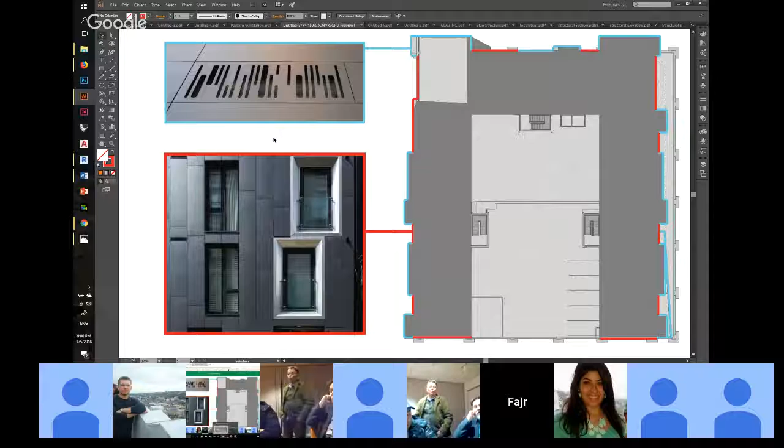My instinct is to start with elevation studies like this example. Can you do about a 10 to 15 foot wide swath, all the way from grade to the roof, to the parapet—a large, nice drawing oriented vertically—and then do a corresponding wall section cut through that, incorporating a balcony idea into both the elevation and the section cut.

I kind of did this, and I'm thinking that's what you're talking about. I'm sharing my screen—it's not showing the separation of the balcony from the other panel. No, I want to take just a slice of the long elevation, not the whole elevation.

Wait Nora, how did you put the Equitone on the screen—on the elevation in Revit? Oh, I didn't use Revit, it was Photoshop. You're very clever, Nora. If we do that in Revit, we'd have to create our own family for each panel, different families, just to change color on all of them.

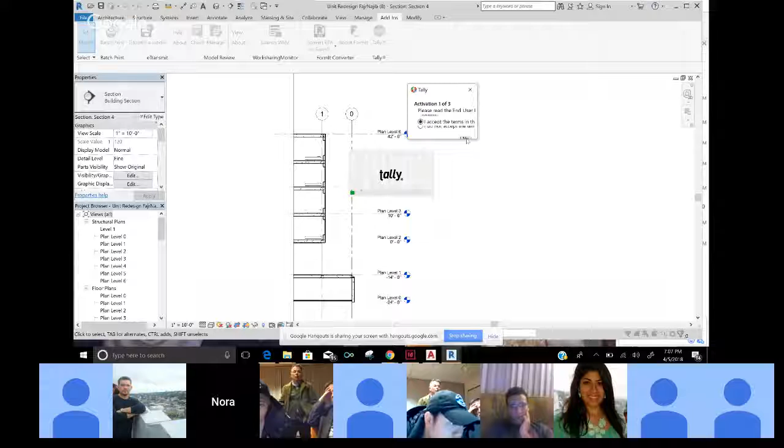Let me share my screen real quick, I don't know if that makes sense. It's literally how - is it a display issue? I have Tally here, but once I click on it, it gets stuck and doesn't do anything. So if you see that screen, for me it's larger and I can click on it and see more options, but hers is too small so she can't click on anything or access the options. I can do this, it prompts me to this, and once I accept I don't know what's going on after - I can't open the window, even if I click it. I'm wondering if it's a screen setting.

Any idea, Fajr? No. So Fajr, is it working for you or no? It's working normally for me, but I have my own computer, I don't use a school computer. Nora doesn't have a school computer either, right? No, I don't. What is your screen - it's weird.

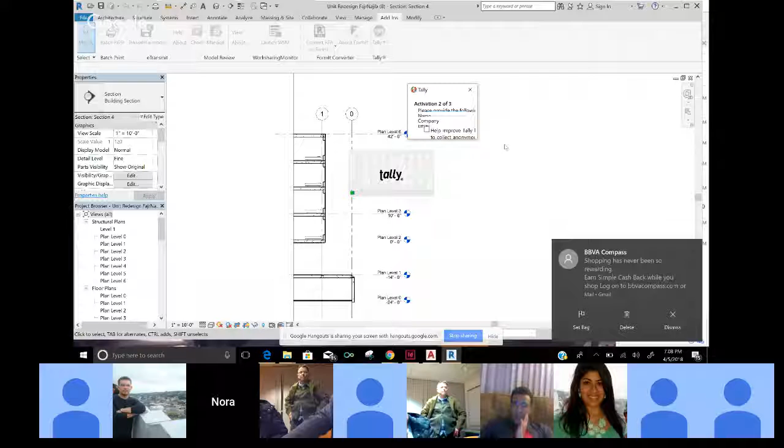What is your screen resolution setting, Fajr? Do you remember? I can look at it right now. I think it's 1920 by 1080. Nora, what's yours? I'm not sure, do I go through Revit or just check another way?

Right click on the desktop, go back to the desktop, then display settings, then go to advanced. Where is it? It's right there - resolution. Maybe drop it down. Wait, what's that, 250%?

Try 100%, 150 works too. Wait, leave it at 100%, then change it to 1080. Yes, I think because his screen is so large, 1080 is not quite right. Just work through it with them and let's see what happens next. Then go back to your Revit and do what you did earlier. Whoa, that's weird - no, that's a big mouse though.

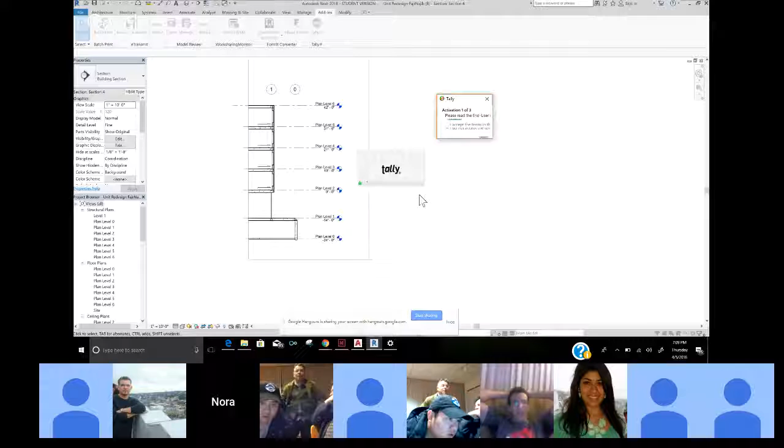Do you have to be signed in to activate it? Did you register, Fajr? No, I didn't have to, I just did the exact same thing - I clicked on it and the page was just larger. This is only happening for her. Okay, I did have a help request out, and Nora, I haven't been on the computer for hours so I don't know if anything came back to me, but I'll check when I get home. I'll also send a request to Autodesk.

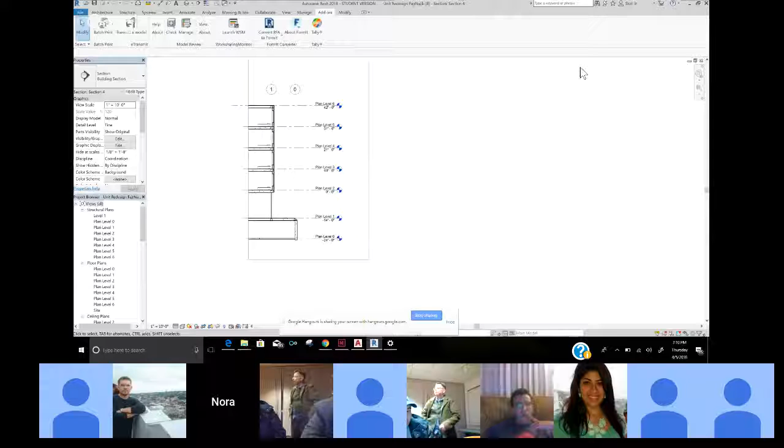In the meantime, I would go back and look at that Revit daylighting YouTube video link that shows how that can be done, and see if maybe you want to try that as an alternate for daylighting. Okay, sounds good. Thank you.